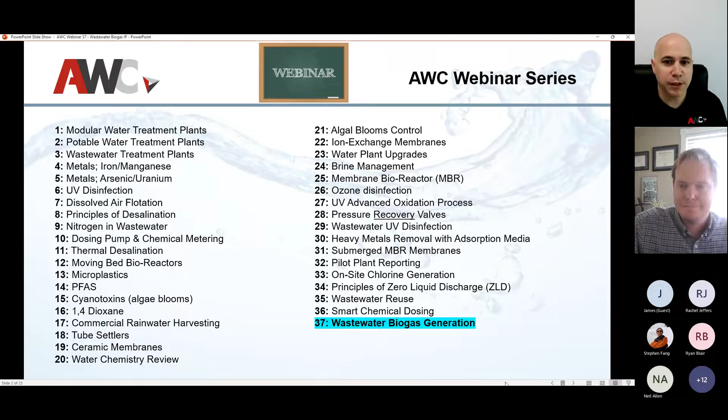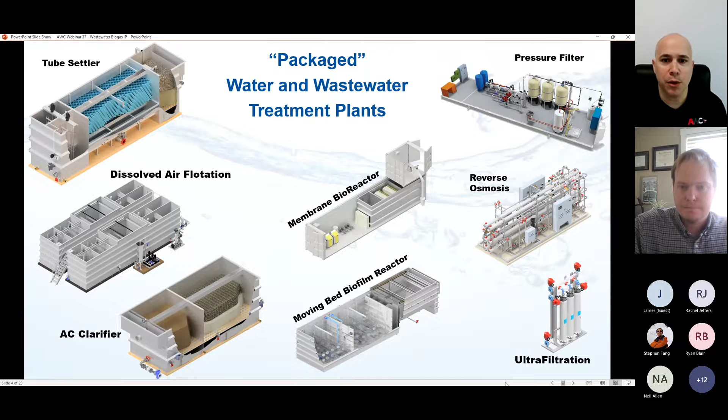Quick thing about AWC - we've been around for 40 years, we design and build water and wastewater treatment plants. We have close to 600 packaged plants worldwide, mind you most of them are here in North America, but we continue to grow. Everything gets divided into three: standard potable water plants with dissolved air flotation clarifiers, wastewater which ties into today's subject with both MBBRs and MBRs, and skid mounted systems which tie in to each other. Especially as you go into wastewater reuse, or in this case wastewater reuse for energy, there's always a way you can add some of these skid mounts for both UF and RO. So with that, enough about us - wastewater biogas generation, Ian, take it away.

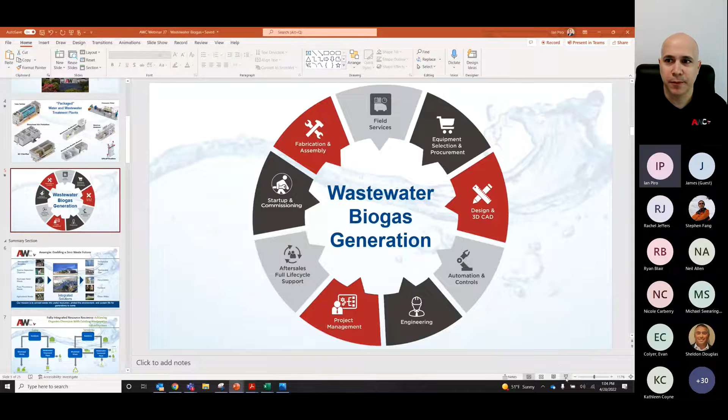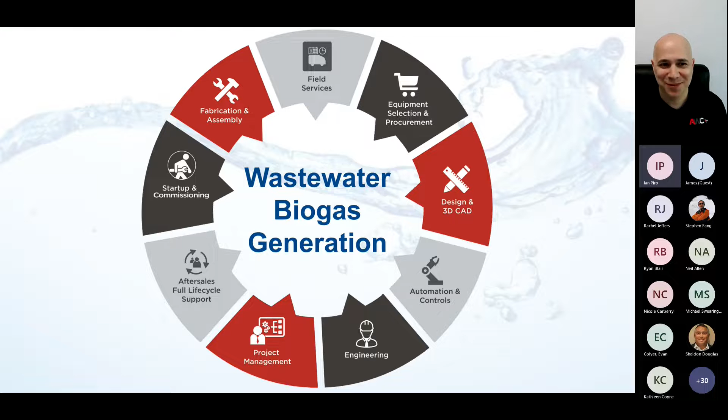So yeah, thank you Alex and AWC for organizing this. The YouTube channel is great, it's 36 of them, 37 after this. It's a great resource to have these little bite-sized technology summaries, so glad to be a part of it and glad to contribute. I really wanted an hour to talk, but Alex, kind of like the Rolling Stones, you can't always get what you want, so he gave me 15 minutes. So we got to get cranking, a lot of good stuff to cover.

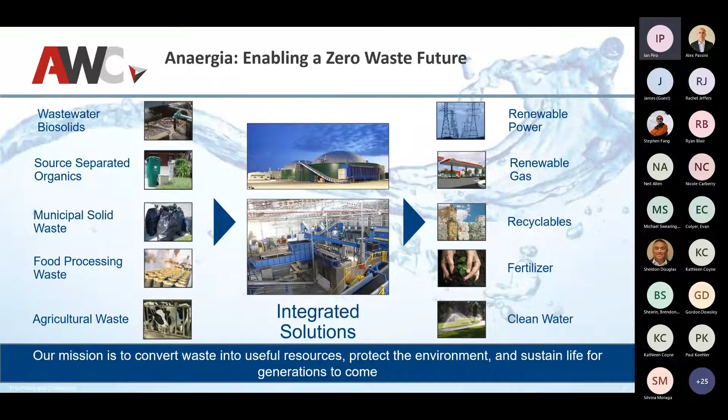My favorite thing about the water and wastewater industry is that we tackle some of the largest environmental problems that society faces, that the world faces, really every day with our everyday jobs, be it front lines at a wastewater plant or a water plant, the engineering side, or even project development. Not unlike our industry, Anaergia's mission is to take the largest organic waste streams of society and provide a series of solutions to convert this waste. We consider waste a feedstock to be able to generate valuable products such as renewable sources of energy, fertilizers, and clean water. A big piece of this is utilizing our existing wastewater treatment infrastructure to divert organics away from landfills, where they would be emitting methane, to wastewater treatment infrastructure to generate valuable end products again such as energy, fertilizers, and clean water.

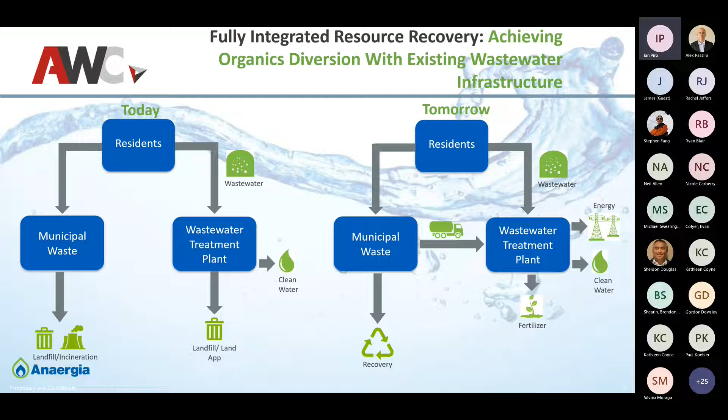So Anaergia's vision for the world, and what our technologies are all centered around doing, is bridging the gap between municipal solid waste and wastewater treatment infrastructure, because you can revitalize and retrofit our existing wastewater treatment infrastructure to divert materials away from landfills, create feedstocks for anaerobic digestion, and generate renewable energy sources such as renewable natural gas, which is methane in our current carbon biogenic cycle. It's offsetting the need for new fossil fuels, and producing different types of fertilizers.

So to zoom even further into what the process actually looks like at a wastewater plant, the process of anaerobic digestion really is the center of where waste management, organics management, and water all meet with energy. By utilizing anaerobic digestion at wastewater plants or standalone merchant facilities, you're able to take the predominant waste streams of society.

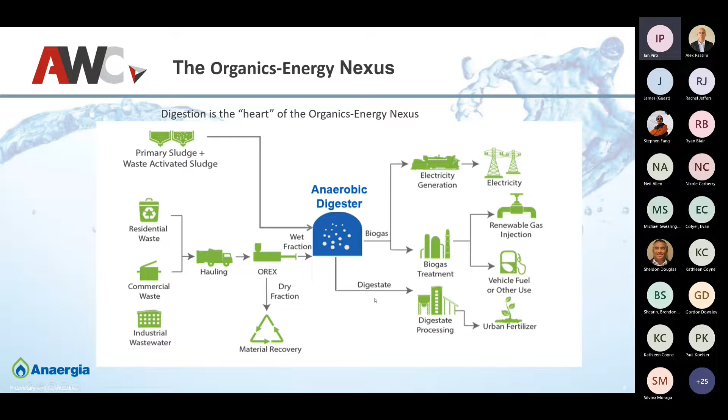Municipal garbage, where you can extract the organic fraction, convert it to a feedstock, and send it to an anaerobic digester, or your general residual sludges generated at wastewater treatment plants. Through processing it through an anaerobic digester, you're able to produce biogas that you can either use to power engines for renewable electricity, or, as we're seeing increasing trends towards, make pipeline quality renewable natural gas. You also generate a digestate, which can be dried and pyrolyzed to produce an urban fertilizer free of contaminants, thus returning nutrients back to the soil, closing the loop on the waste management cycle.

So to zoom even further into the capabilities of anaerobic digestion: an anaerobic digester can take a wide range of organic feedstocks, everything from energy crops. You see more energy crops in Europe and some in Canada than the US, but I think we're catching up. These are purpose-grown crops like grass or maize that are just grown for feedstock to anaerobic digestion.

You can also take agricultural residuals such as manure. We're seeing a large uptake in dairy manure digester projects because the carbon intensity score is very favorable, so the gas that a dairy manure digester creates is very valuable for its environmental attributes, which you can sell in different state and federal markets. There's also food processing waste, everything from fats, oils, and greases collected from a grease trap at a restaurant or fast food joint, or larger food processing facilities, and of course wastewater treatment sludges. You're able to take this material and produce valuable end products such as renewable natural gas and recover nutrients for fertilizers.

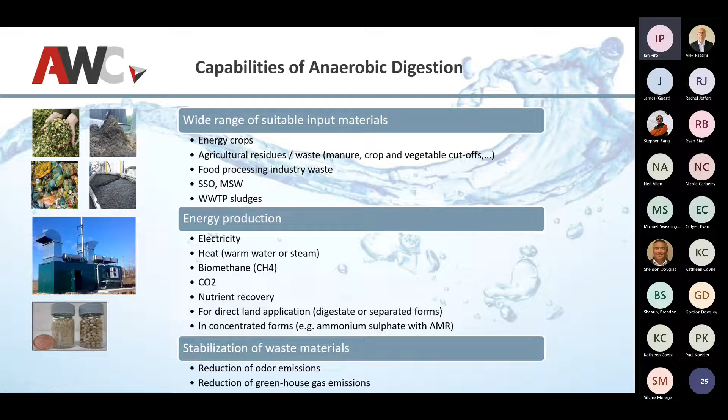So to go even further down, to get to a more granular level: what is anaerobic digestion? It's the natural biological conversion of organic materials, like those feedstocks we talked about, into methane and carbon dioxide gases. Biogas is predominantly methane, about 60% on average, with the balance being carbon dioxide and some trace other gases such as VOCs, siloxanes, and H2S.

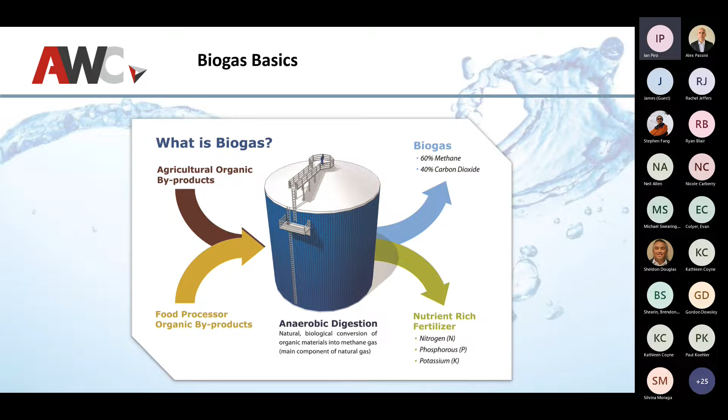You're also producing a nutrient-rich fertilizer, which can be land applied, or further processed through drying or pyrolysis to create a soil amendment used as an urban compost or other applications. So there are several different types of digesters, but for this conversation we're going to focus on continually mixed digesters. There's plug flow, batch garage digesters, lagoon digesters, and other high rate, more industrial digesters too. But at Anaergia, we really specialize in these continually mixed systems.

So at a very high process level, you have your input, again those feedstocks we talked about, say your municipal sludges or different types of food waste, pumped into the digester and mixed with the digestate, which is essentially your biomass. Those are your microorganisms, a complex colony of microorganisms that biodegrade the waste into biogas and also the digestate.

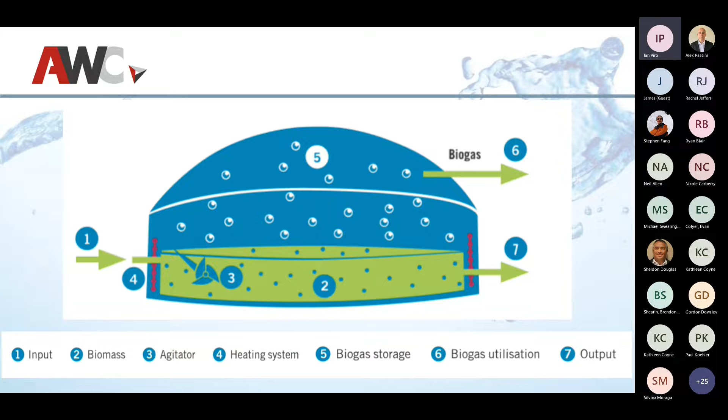At the same time, you want to heat the biogas reactor - you can think of a digester kind of like your stomach. The microbes in the digester like to be around 90 degrees Fahrenheit. And then, of course, you generate your biogas, which accumulates in either the headspace of the tank, in which case you can put a membrane gas holder cover on top - it looks kind of like a balloon, I'll show a picture of it - or you can pipe the gas over to separate storage.

So talk a bit about the actual biological process. It happens in 4 key stages. The first stage is you have your hydrolytic bacteria who take your larger molecules, your carbohydrates, your fats, and your proteins, and break them down into more soluble components that then the other microorganisms, the acidogenic bacteria, can take into their membranes.

Those more soluble molecules produce volatile fatty acids, which can then be utilized by methanogens, a kind of archaea, to produce biogas. So really, long story short, it's a complex colony of microorganisms that all work together in concert, not unlike activated sludge, to produce biogas.

Your two limiting factors are really the hydrolysis step, trying to reduce the molecules down to the smallest. You'll see in some cases digesters employ a pre-treatment step where they either chemically or physically try to break these molecules prior to entering the digester. You can see this with thermal hydrolysis or chemical hydrolysis.

And then your methanogens too are very, very finicky microorganisms, so they tend to also be a rate limiting step, and they're very sensitive to the conditions within the digester. You see two predominant types of digesters from a temperature standpoint.

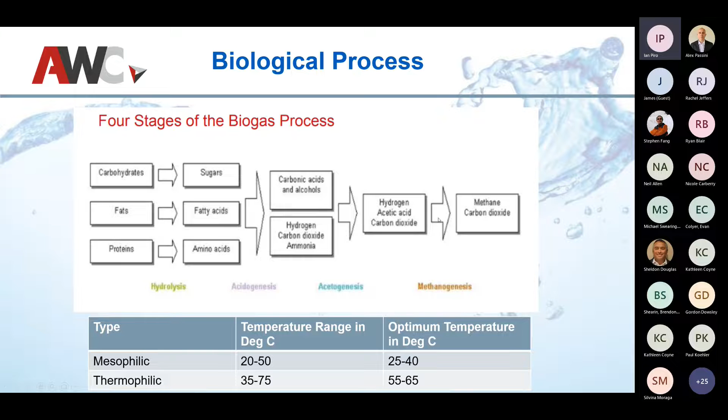Your mesophilic, which we mainly operate in—think about your body temperature, your bugs like to be in the 90 degrees Fahrenheit, very similar to our own biology. But you can also run them at higher temperatures for thermophilic, with different process advantages, especially around pathogen reduction. So moving on, talk a bit about the biogas.

You can see a wide range of methane in the biogas. We typically see anywhere from 55 to 80% methane, and the balance being carbon dioxide, then other trace gases such as siloxanes and hydrogen sulfide.

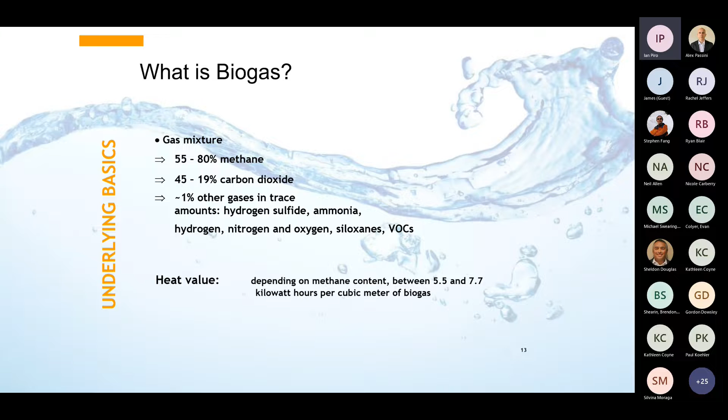These trace contaminants tend to cause issues with the reuse of the gas. For instance, siloxanes, if you don't remove them prior to putting them into an engine to generate electricity, you're going to oxidize silicon and end up with this white powder, essentially sand, on all of your downstream equipment. So it's important to put processes in place to clean up the gas, to beneficially reuse it.

So it brings us to the energy recovery options. We typically see two predominant options beyond just flaring or making heat in boilers: renewable power through combined heat and power engines. For this, you have to condition the gas prior to burning it in the engine to remove H2S, ammonia, siloxanes, and VOCs, because they can be pretty hard on equipment.

We're seeing a huge shift away from CHP towards the production of renewable natural gas. This is pipeline quality gas, where you take it a step further. You still have the same conditioning steps as you would for CHP engines, but you take it further by biogas upgrading, where you remove CO2 to upgrade the BTU value of the gas, and then you're able to either compress it and use it as vehicle fuel, or put it in the local gas pipeline and sell it in the natural gas market. It's a tremendous opportunity to further utilize biogas and fuel that's generated.

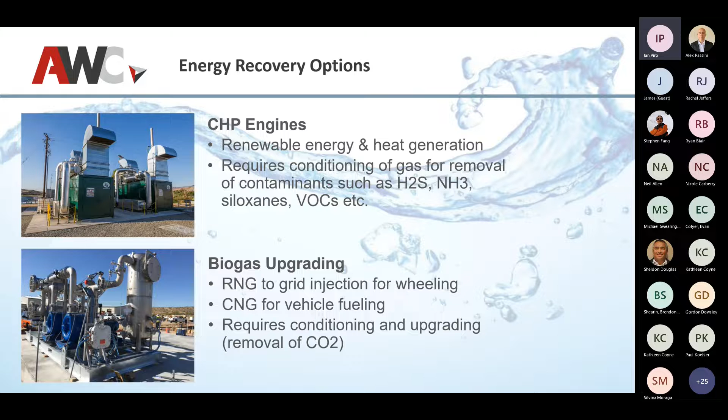Again, this is in our current carbon cycle without having to go to fossil fuels. And it works great for the large transportation sector, and also for harder to decarbonize sectors that aren't necessarily going to be able to go towards solar power anytime soon because of the heat demands, such as steel.

This particular facility generates just under 1 million MMBTU per year, which, to put in perspective, is essentially the equivalent of taking 50,000 cars off the road with the amount of carbon that it offsets. So a tremendous environmental benefit, and it's putting that gas right now into the Southern California natural gas pipeline.

So those green molecules are moving through the natural gas pipeline because of this Rialto bioenergy facility, and it takes 700 tons a day of food waste, which is extracted from municipal garbage. So it's materials diverted away from landfills. It would end up in a landfill, but now is being digested and producing renewable natural gas.

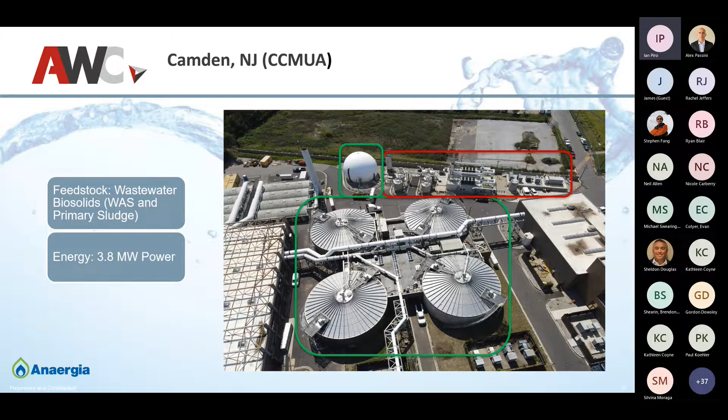And they put the system into place after Hurricane Sandy because they want the ability to have complete resiliency in case they lose access to the power grid. So this plant is able to go into island mode and purely power the critical loads of the facility from both biogas, and they also have a solar array on their primary clarifier. So it's a great example about how a wastewater plant can, by utilizing its own biogas it is generating, by digesting its internal waste activated and primary sludge, be able to produce biogas to power the facility.

So for the wastewater folks in the virtual room, I want to throw up a couple of general process parameters here. When you look at digesters, your SRT and HRT is the mean residence time it takes liquid to go through the digester. Now, the thing I really want everyone to focus on here is that your typical conventional municipal digester is being fed 3 to 6% solids, depending on if you're thickening your sludges. So pretty low solids content going into the digester. The digester itself is only operating at about 2 to 3% solids. So the balance of that is all water.

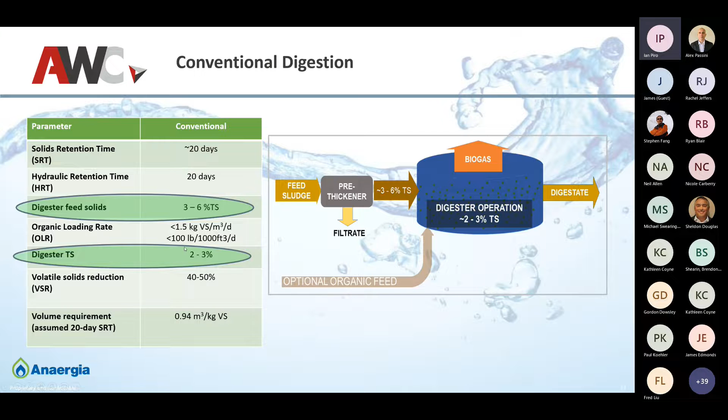As a result, the organic loading is about 100 pounds per day per 1,000 cubic feet. So in line with those numbers, there's a huge opportunity for digesters to be operated more efficiently and follow the industry trends towards process intensification. You look at some of the systems that AWC is developing with MBRs and package plants. These days, you can do more with less space with more process intensive technologies like MBRs, or IFAS media and aeration basins. So it's about time for the digesters to catch up and operate more efficiently with smaller footprints.

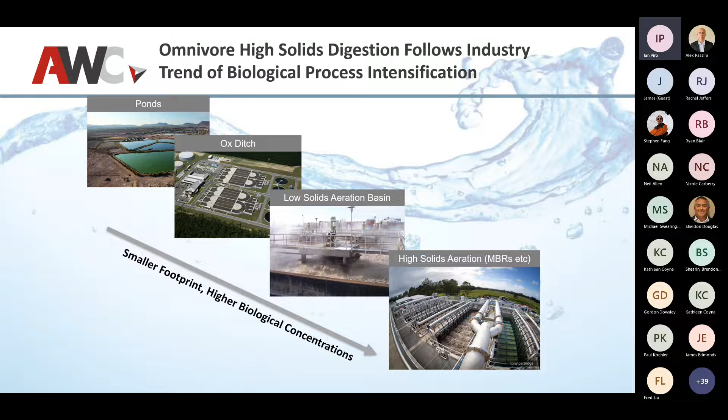So the technology that Anaergia has developed and deployed, we have several installations in North America, is our Omnivore digester platform, where we're able to triple the capacity of existing digesters, or if it's a new construction digester, it's a third of the footprint, by applying two key changes or optimizations to the proven digestion process that's been around forever. We introduce a specialized thickener, so we're feeding the digester at over 12% solids. So again, that other digester is being fed at 6. The Omnivore is getting fed at 12%. So you're getting less water into the digester, and the digester is operating at around 6% solids.

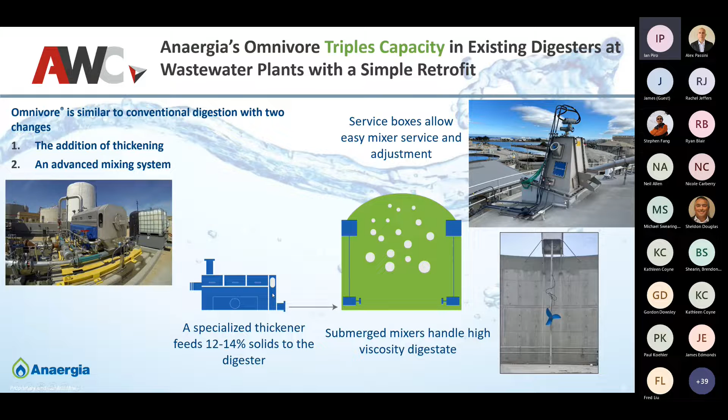So what that means is that you're able to triple the capacity of the digester. If you look at the organic loading rate, the conventional digester that was operating at 2 to 3% solids, the organic loading rate was around 100 pounds. You can see with the Omnivore, which is now operating at around 6% solids - that seems to be the common operating point - you're at 300 pounds. So you're able to immediately unlock additional capacity by either retrofitting this to run at higher solids, or if you build a new tank, it's a third of the footprint.

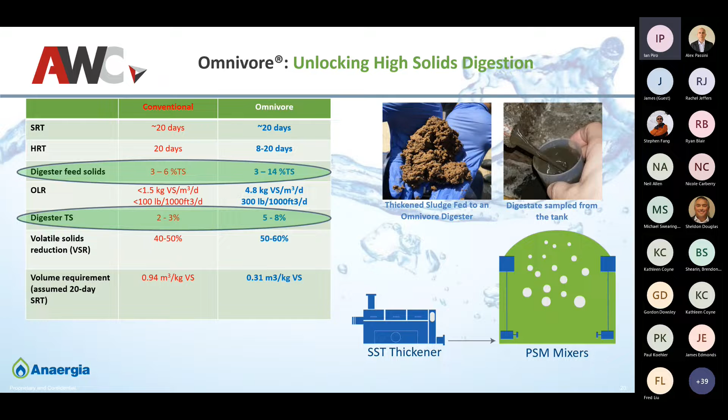So I know you might think to yourself, why isn't every digester doing this? Why do we operate our digesters at municipal treatment plants at such low solids? Well, the issue has been historically mixing. Mixing is kind of the heart of the digestion process, because it allows your inbound feedstock to maximize contact time with your biomass, to be able to degrade the solids and volatile solids and produce biogas.

Your traditional mixing systems can't keep up at 6% total solids. You have your linear motion mixer, a plunger style mixer that goes up and down the tank and disperses the liquid. Then you have your pump mix system, which pumps and recirculates the sludge in the tank at various points. They do a pretty good job up to maybe 3 or 4 to 5% solids, but once you get over 5% solids, these mixing systems really can't keep up.

That's why Anaergia has developed our PSM, our permanent magnet synchronous motor mixer, which uses a high torque electric motor. It's the same motor that a Tesla uses. Very, very efficient, high torque, and it's able to mix the tank. These are CFD models, and the takeaway with these figures is that the darker the colors, the less mixing, less velocity in the tank.

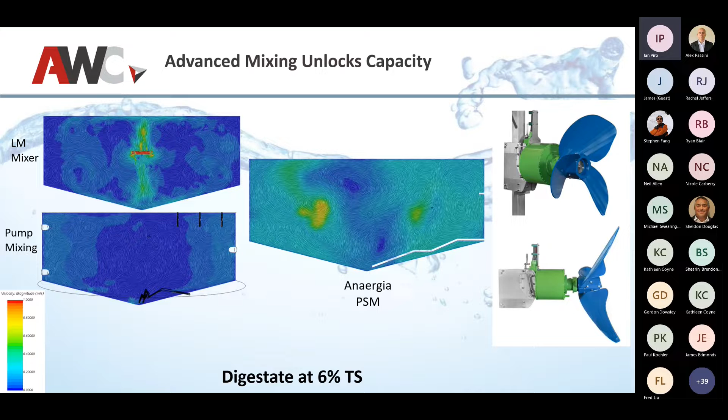You can see here that at 6% solids, traditional mixing systems just couldn't keep up. But with Anaergia's mixing system, we are able to unlock that capacity by completely mixing a tank, getting over 90% of the tank to a critical velocity well over 0.3 feet per second, which we find is just the optimal mixing set point.

So in summary, by converting the traditional digesters and optimizing them for high solids, you're able to triple the capacity, or you can gradually increase capacity over time. You can first upgrade the mixing systems, and then over time increase the thickness of the material, the percent solids going into the digester. Less capital, this means smaller tanks. You can consolidate tanks, or work with existing sludge holding tanks and convert them over to digesters.

And then you're able to transition wastewater plants from net energy users to net energy producers, because by increasing digester capacity, you can bring in more outside waste, outside feedstocks, produce more biogas, and ultimately become net zero or an energy exporter.

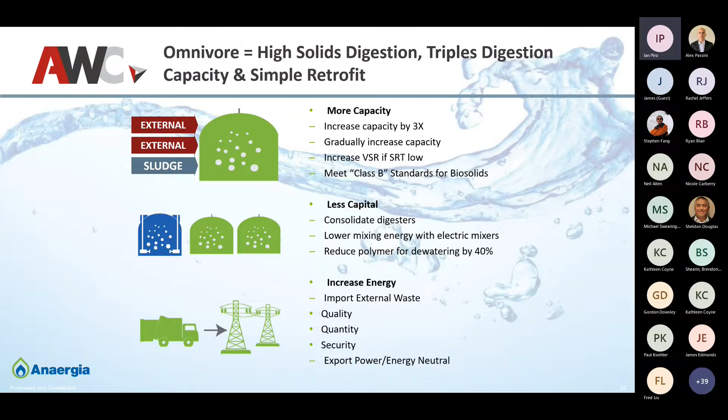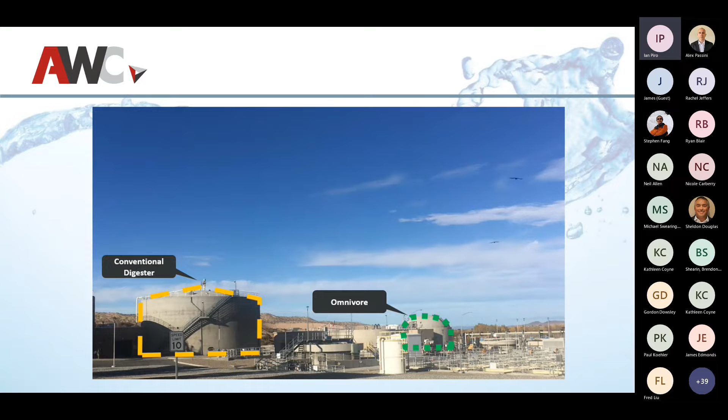Thank you, Ian. Wow, that was very compact. I have a long list of questions myself, but I'm going to open it up because I have a few of them here in the chat box. Andrew, thank you very much for your questions, I can always count on those. So the first one I have here is where to go. Oh, the chat box is there. All right, so it says, could you talk about the residuals that would come out of the final digester?

That was actually one of my questions as well, what's the digestate look like? Yeah, so essentially it's a sludge. In the case of the omnivore digesters, it'll be a 6% solid sludge. That material will then be dewatered to about, either through a belt filter press or a screw press or a centrifuge, to about 25% solids. It looks like kind of a wet mud. Then that's when it can either be land applied, or you can take that wet mud and further dry it into pellets, and it essentially looks like a mulch. You can market that as a product. It really depends on what your end use for the digestate is. If you have a relationship with a farmer and you can land apply it, then you don't necessarily have to dewater as much, or you can put it through a dryer and make pellets. It just depends on the end use of the material, but it's versatile.